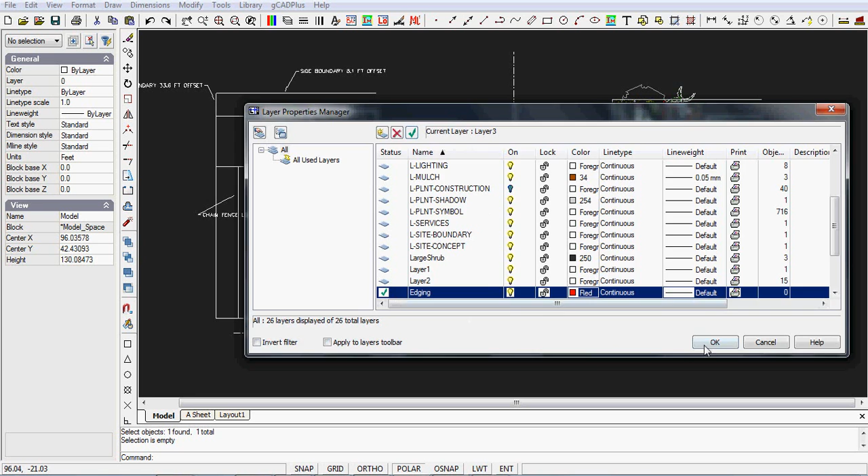That's the green tick there, you could click up here. So now, if you have a look over in the properties box on the left, and this is why it's so important to keep that box up, you can now see that whatever we put will be drawn by layer, and since we've set the colour of the layer to red, whatever we put on that layer should show.

We're going to draw this edging with what's called a polyline. So it's draw, polyline, and just put a series of control points in. Now, I've got polar on, that'll force things into either horizontal or vertical, so I want to take that off. So what I'm going to do is click in and around and work my way and give myself a rough shape of the sort of shape that I'm after, then right click to enter.

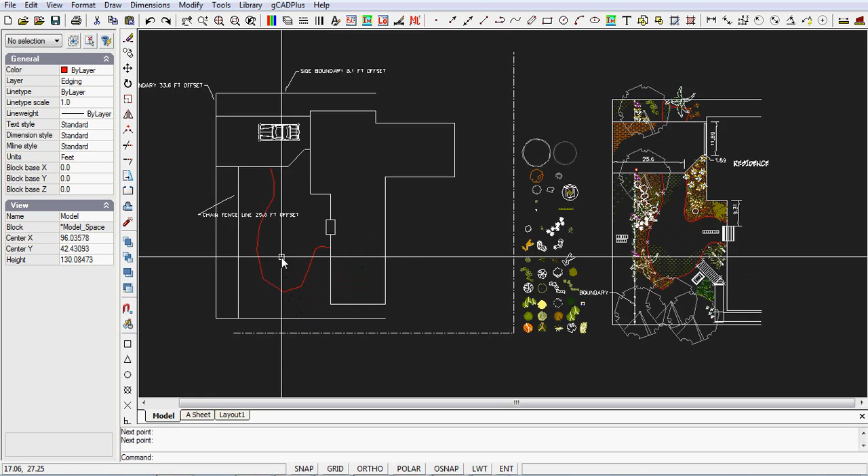That finishes it, and I'll now zoom in on the shape. What I then do is select it, and you have a series of different curve fitting options. So under fit smooth here, I'll choose quadratic B-spline. You don't have to worry about the terminology, it just means make it a smooth curve.

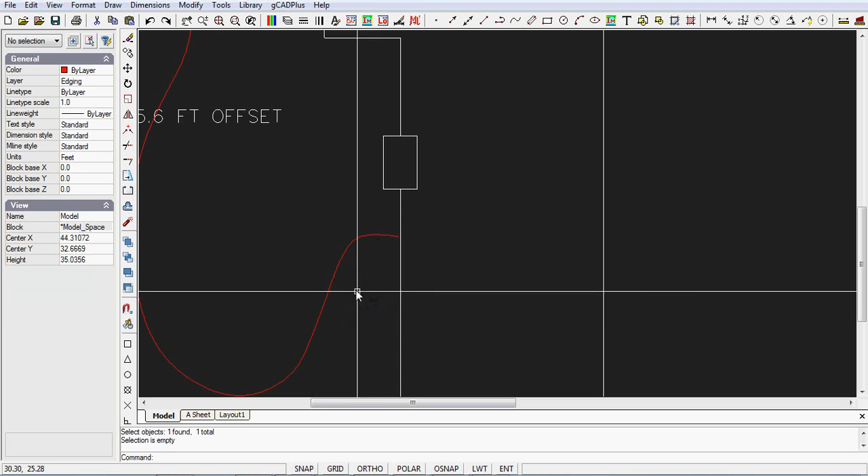That did a reasonable job, but I think I might like to change this one a little, so I'll just tweak it by moving that edge around. Now, if you wanted to, you could hit any one of those control points and add an extra one. So I'll hit this one here and right click, and sorry, it's not that, that's moving that one. Got to be a little bit careful.

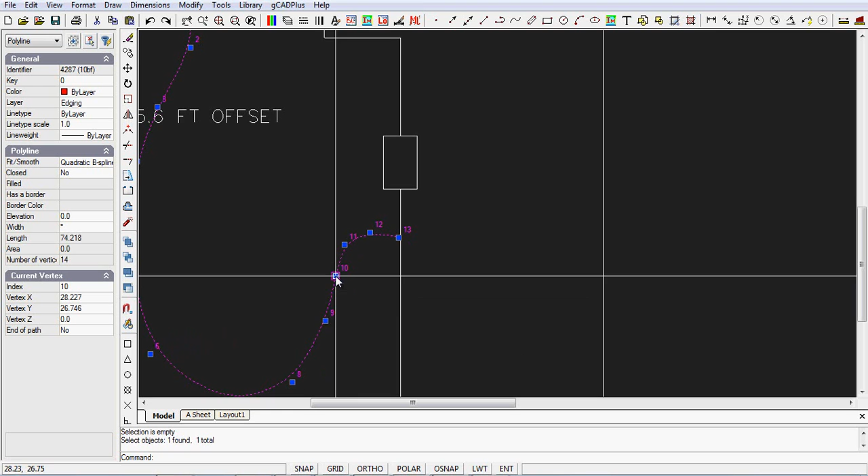If I right click over the top, I can insert a new vertex. Can you see that puts another control point in, so I get even finer control and I can move it up or move it down. So can you see you've got very good control over the flexible line that we've put in there.

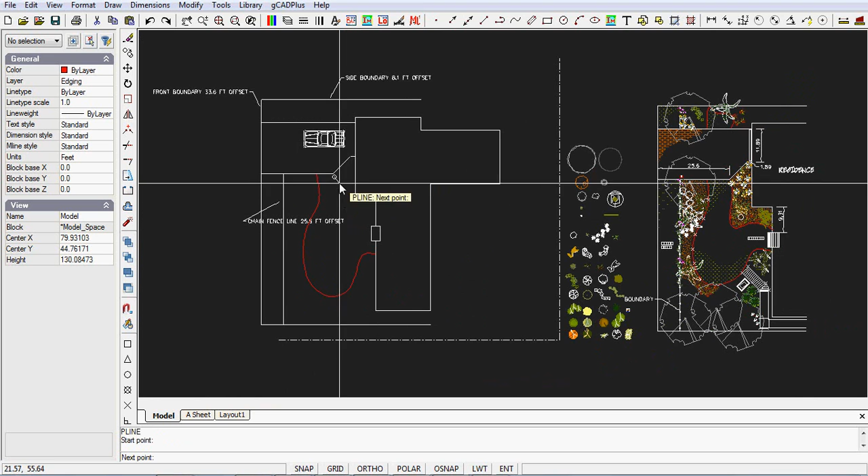And if you notice over here, there's another flexible line, so we could right click to repeat the polyline command, and we could start it around here, just come through there and around and like so, and right click to enter to finish it. Select it again. Just for fun, I'll use a different sort of curve fitting, I'll take a cubic B-spline, and that gives you a slightly different shape.

And we could maybe now zoom in on one end, and I can pick that end point there, and you see I've got it, I'm dragging it now, and I could drag it to the intersection of those two lines. So now that curving line meets precisely there.

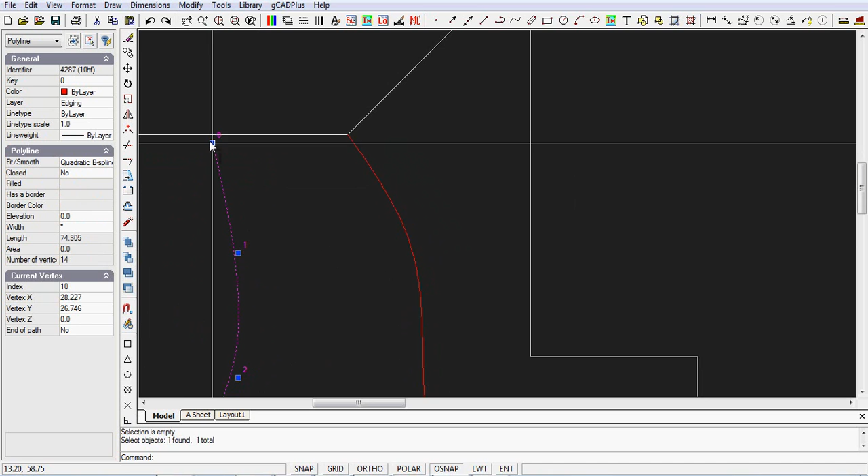With this one here, what I want to do is to move that one, and I might want to move it perpendicular to that line, and I could use the perpendicular option, click it, and then perpendicular and come in there. So that line comes perpendicular in. So we've got a reasonably nice shape for what will be a lawn area. That's your next little piece of work.

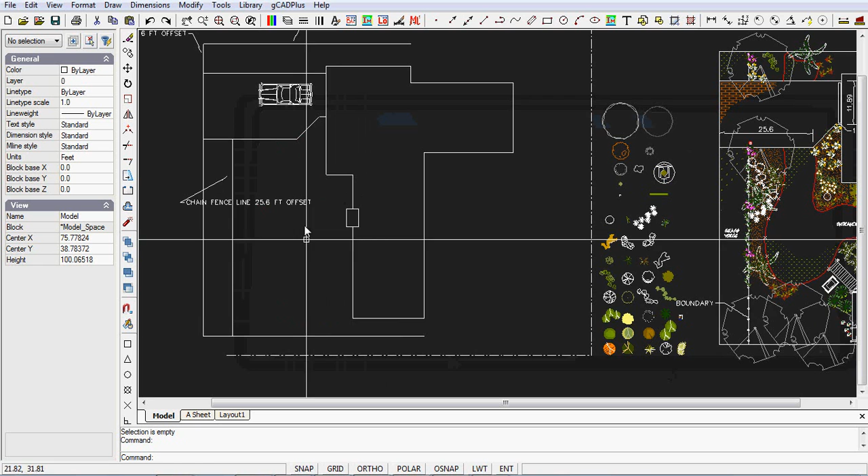If I click the layer tool again and make layer 0 the current layer, I could come down to our edging layer. Now I've lost it, it goes into alphabetical order. We called it edging. There was already one called L edging, which I could have used, but it's red, so I can click on the little light bulb, and if we get lucky, it'll disappear. To bring it back, it's just a matter of clicking on the light bulb.

You might notice down here that the drafter who constructed the original drawing is using a whole series of layers called L dash, and the American Institute of Architects suggests that for all landscape work, your layer naming convention should be organized in that way. So L dash lighting, L dash mulch, L dash PLNT symbol indicates entities put into an electronic or digital design that has been done by a landscaper.

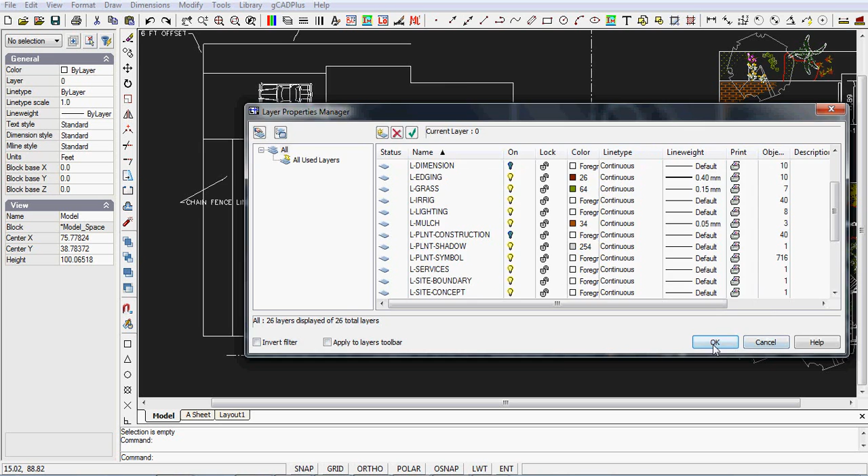Might also notice over here that the edging layer, not that edge layer that we did, is set with a 0.4mm line thickness. So if I turn on line weights, you will notice over here that the line appears thicker relative to some of those white lines. But I digress.

It's time for you to put in those flexible garden bed edging. You might notice up here that this designer has extended those edgings over across the driveway.